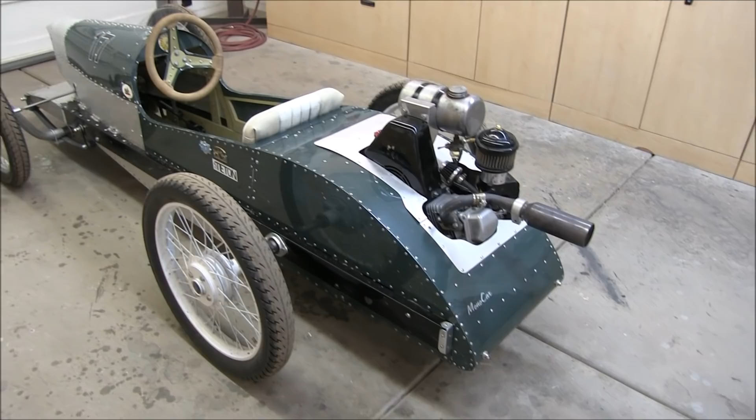I've had this dream for a while to upgrade the Monocar to a differential. So I've been collecting parts. I have a differential there and hydraulic brakes, new rear hubs. So I plan here to remove the rear cover and just try to make an assessment before I rip the thing apart. Try to figure out if I can actually pull it off. This is a fairly narrow chassis, so who knows, we'll see. So I'm going to take off the cover here and see what I can find out.

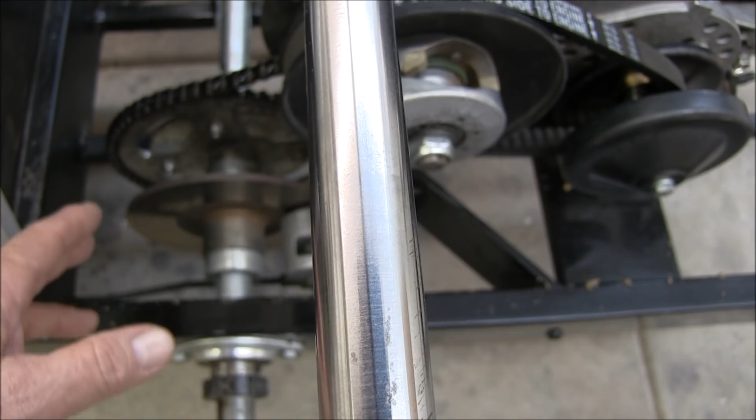So what you see here is a Peerless differential with a vintage Cartco adapter. And then they also make these sprockets. This is a 54 tooth, I believe. It's designed to fit the 40 size chain. Now on the Monocar right now I'm using a 35, and it's considerably smaller sprocket. It's a 35 chain with a 60 tooth. So you can see when you go with a bigger chain, it's a much bigger sprocket.

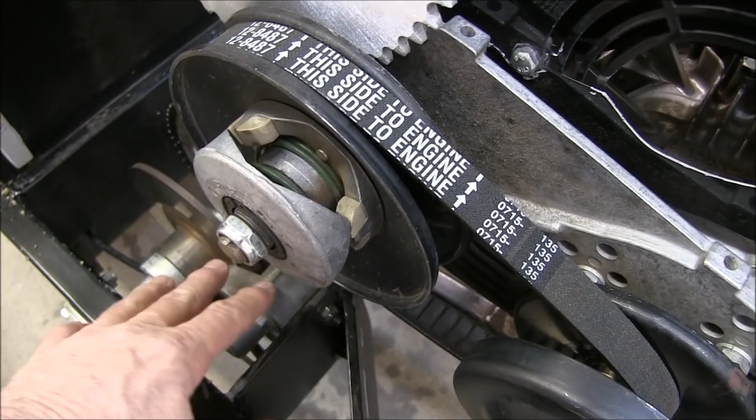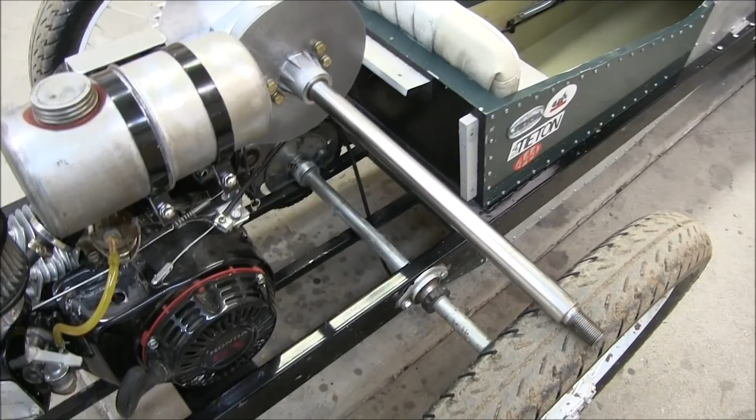So I've been thinking about this, and the way I can make this work is I'll need to remove this bracket in the old brake system, so that'll go away. The new disc, of course, will be right in here where there's ample room, and I'll have the caliper probably up here on the front. Then I can box it in here with the 1x3 tubing. Yeah, that might just work okay.

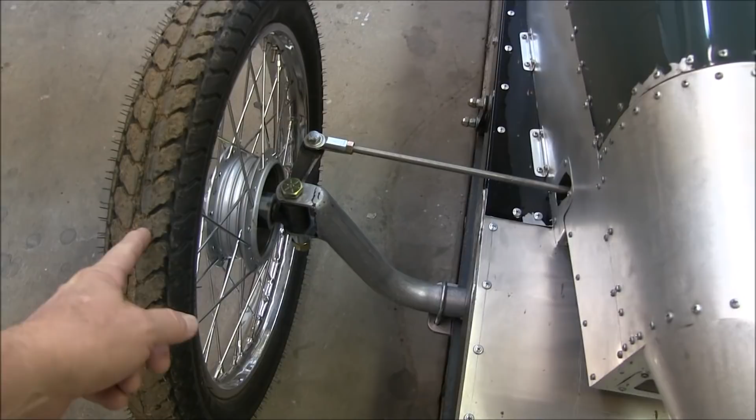See, the width of the track on the front of the car here from center of the tire to center of tire is 38 inches. And with the old go-kart axle, I'm at 36 inches in the rear. But when you run the Peerless differential with the Cartco hubs, your final width is close to, let's see, 38 or 39 inches. It should be pretty close to what I have right now. I forget. I'll have to measure one of their cars and I'll let you know what that is.

Okay, so I've convinced myself that I can swap this differential out. Basically, I got to remove the old setup. I'll take the engine off, and then I'll have to grind and do some cutting to get these old components out of there, and then I can start the process of cutting the frame right here, so this will drop in, and adding some additional supports, which I'll tell you all about pretty much as I get there. Okay, this should be a nice upgrade. A bit of a challenge, but what the heck, right? Okay, let's move on.

So my thinking is I have to cut out these two bars here. I have to cut this out. So that'll get rid of that. I'll get the axle out of there. That'll just create an open area where I can work from without affecting the placement of the motor or how it attaches.

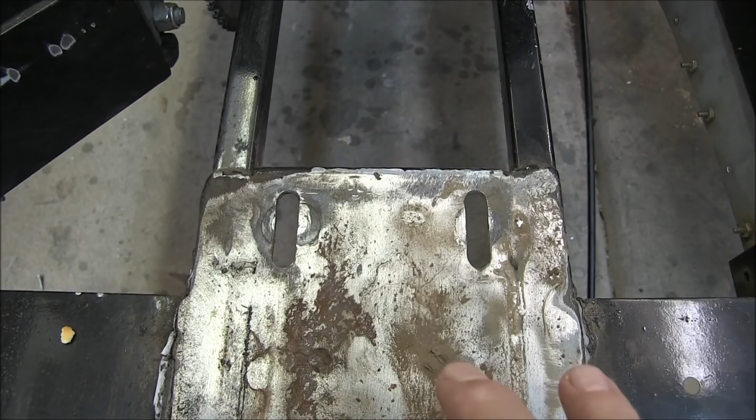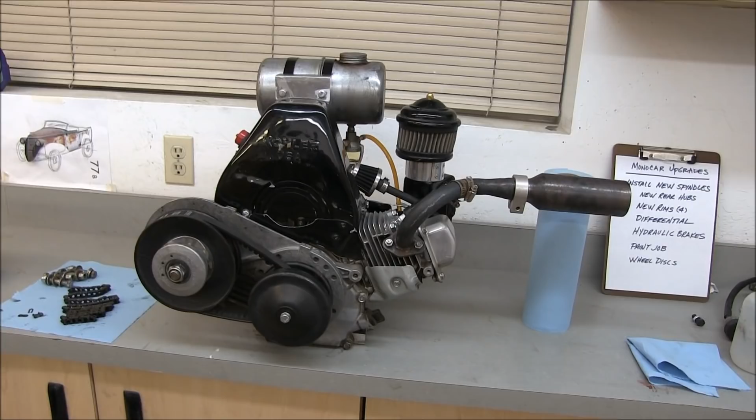I wanted to take a minute and say that, you know, if you're building a cycle cart with the one-wheel drive arrangement, it's a perfectly acceptable way to put together the rear axle. I've had a lot of fun with this car, and there's really nothing wrong with it. Works great. As you can see, this is the drive wheel, and this is the free wheel. So just because I'm switching to a differential doesn't mean I don't like this setup. I just wanted to try something out. See if it works.

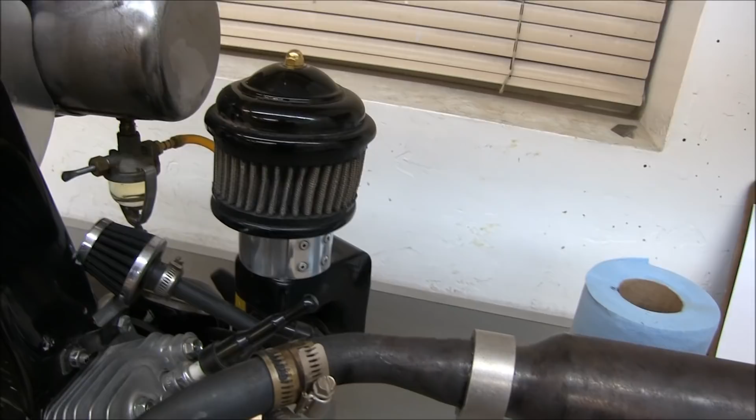A little bit about this motor. Back when I built the Monocar and I originally installed this GX200, it had a modern look to it, you know, and if you were to look at the Monocar photographs, the engine's in the rear and it's exposed. So I didn't want this modern look, so this is where I came up with the idea of grafting on this Kohler shroud and the tank, and then I kind of fashioned this air cleaner and intake. But the whole idea was to make the motor look more antique looking, more like the original car, the British AV Monocar. So it's worked out pretty good.

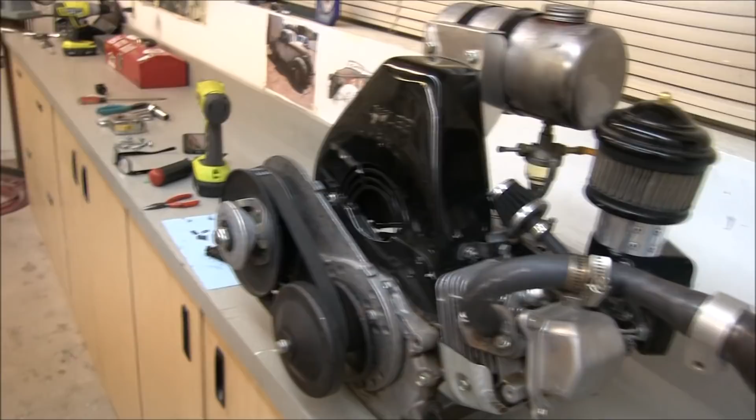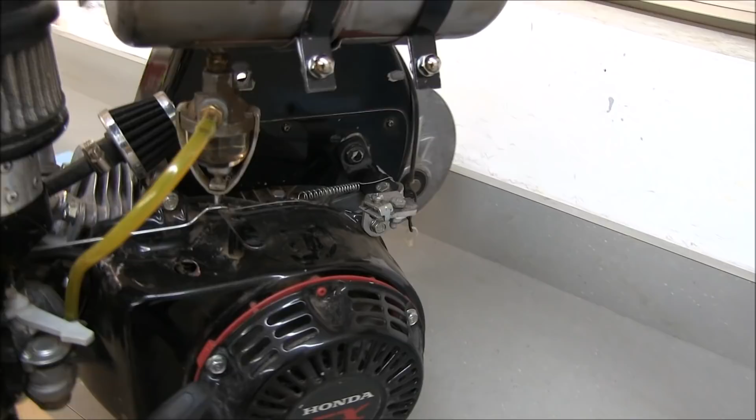You know, I took the governor off this engine. I put the Venturi in it, a timing key, the bored out carburetor, and then a header. So it's running 11 horsepower or so, and it propels this car up to close to 50 miles an hour, which is more than enough speed for me. Anyway, I call it a little sleeper motor because it looks like an antique motor on top, and many people think that it is, but underneath it's a modern engine.

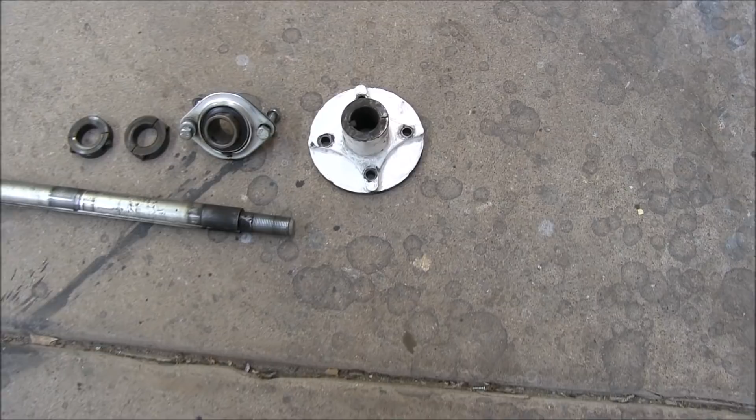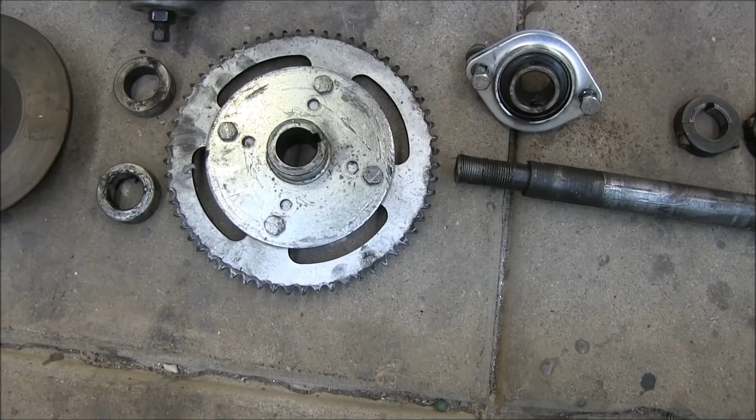Well, I'm not going to lie to you, it took me about an hour to get this axle out of there. Man, it was stubborn. But I licked it and got it done. Here's the components. Cartco rear hub and the bearing and collars, the axle, the sprocket and the sprocket holder, the disc and the brake caliper. Right.

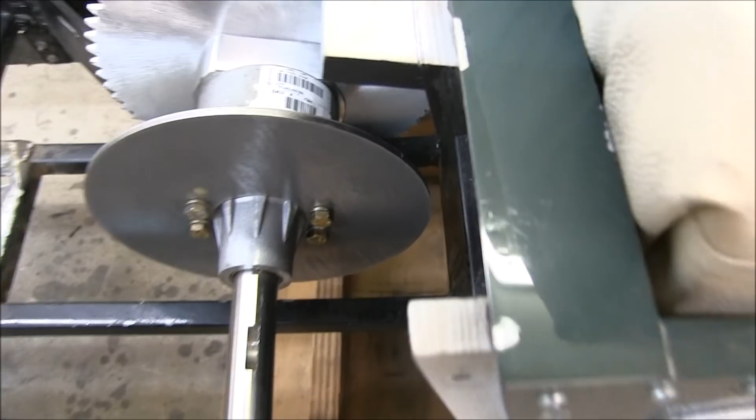Well, it looks like this thing might just work out. We've got the axle more or less lined up, and there's plenty of room for the disc, but of course it's just too tight down in there for the sprocket. But with the smaller number 35 chain and 62 sprocket, it should work fine. I want to cut these two bars out and get this out of here. Alright, yep, this just might work out alright.

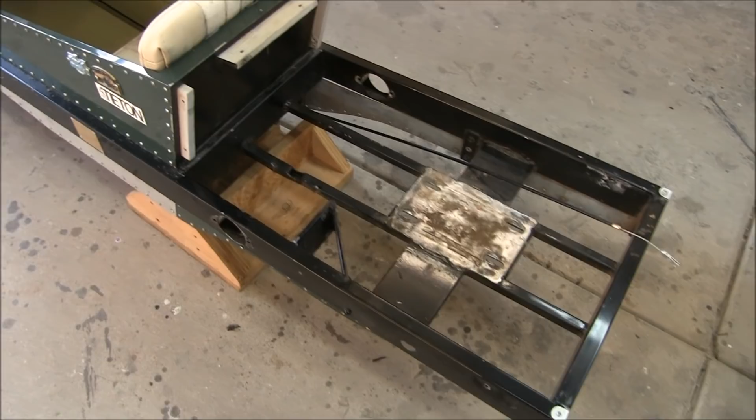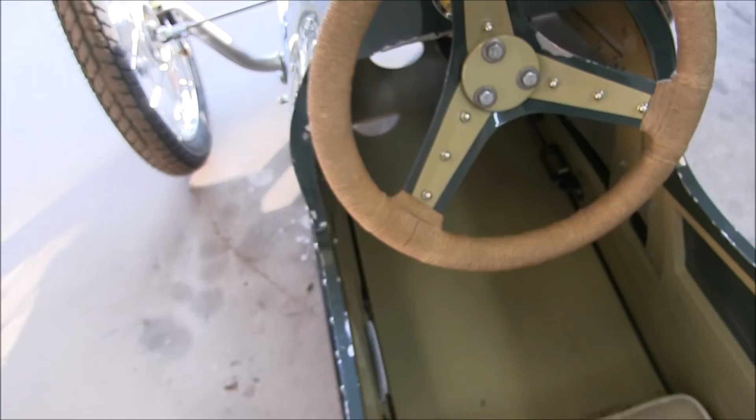I've decided that I'm going to tear this further down. I'm going to basically try to take it down to the chassis. I figure I can get to everything back here okay, but making room for the pedal and the master cylinder and all that up inside there, I think it'd just be easier if I get the body off of it, and then when it comes time to test drive it, it'll just be a bare chassis. Alright, let's take this thing apart.

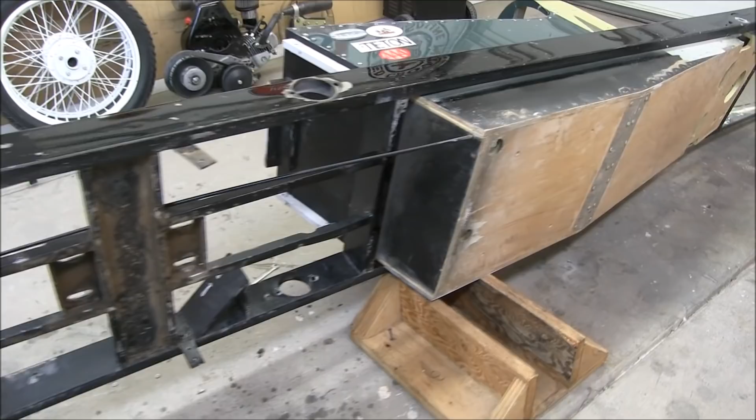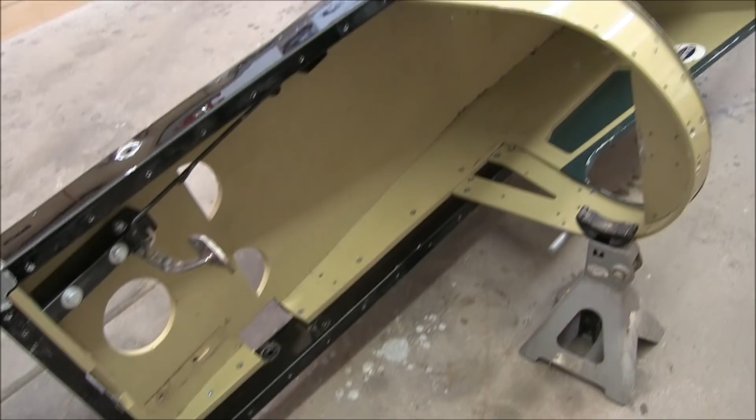I'm making pretty good progress here getting this thing stripped down to the bare chassis. Another hour's worth of work or so and I'll have it where I want it to be. Just a few more screws and I'll be able to pull this tub out of the frame here. Okay, it's time to wrestle the wooden tub out of the chassis. Alright, that wasn't too bad.

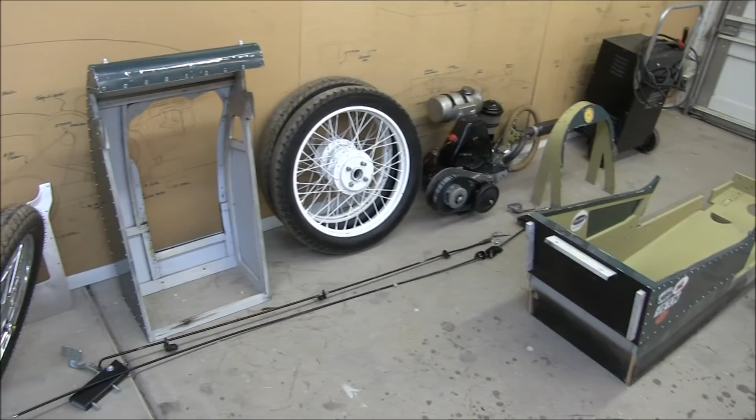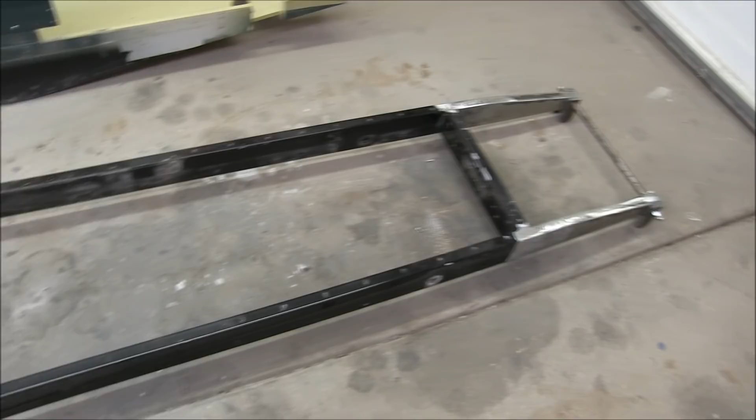So the name of this video series is Rebuilding the Monocar, so I guess that's what I'm doing. It's nice to have it down to the bare chassis because now I can really detail it properly and just clean everything up, freshen it up. I'll have a nice new cyclekart when it's done.

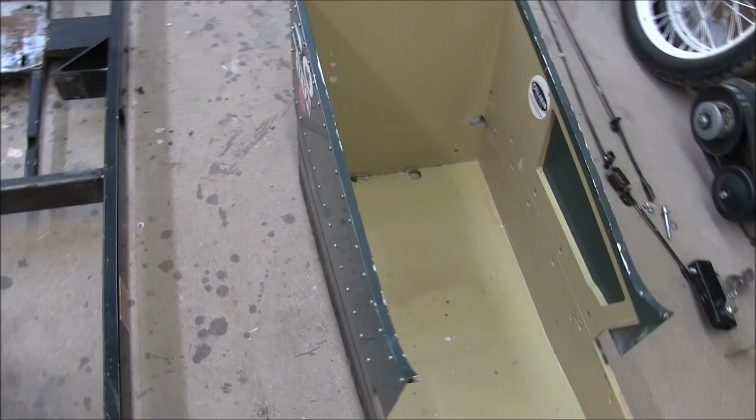You know, I was thinking about how much this thing weighed when I lifted it up. It was fairly light, and I think it was around 11 pounds. And I think that was before I put the aluminum skin on, so maybe it's 15 pounds for the wood tub. Not bad. This car weighed 258 pounds with a gallon of gas in it. It'll weigh a little bit more with this differential, but it'll certainly drive better. Okay, I'm looking forward to cleaning everything up. I thought I would wash the dirt and grease off of this chassis.

So with my Sawzall, I cut out the 2 bars that were right here. That went pretty good. Now this piece, I might take my plasma torch to that. We'll see. That's going to be a little tougher. I also want to strip all the paint off of it. Won't be too tough, I don't think.

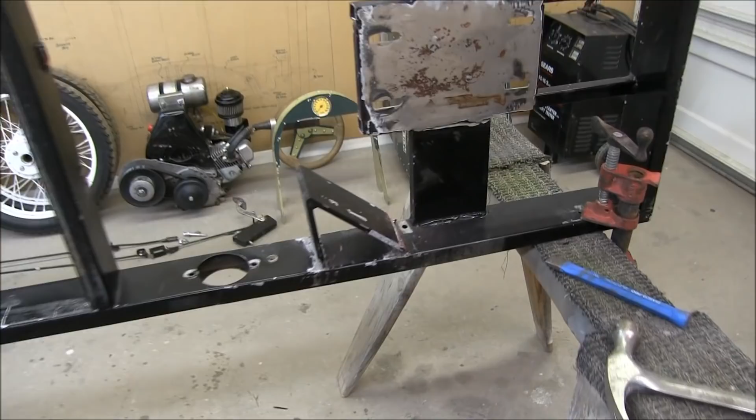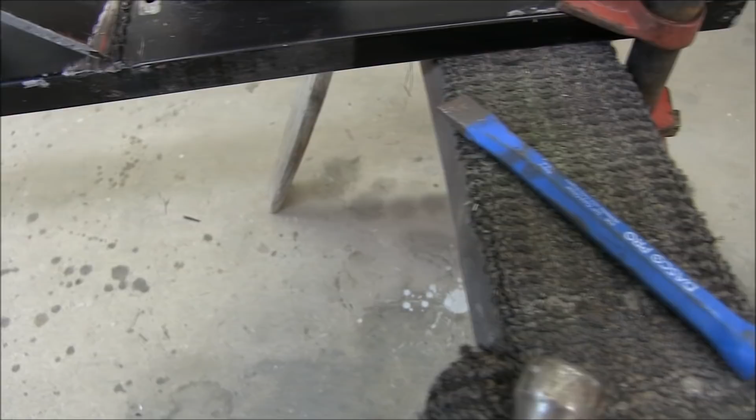Well, removing this piece has been a little bit more of a challenge, but I used the Sawzall to cut through the welds, and then a cold chisel to break it loose, and there I have it. Alright, well that won't be too tough to clean up. Alright, it's coming along.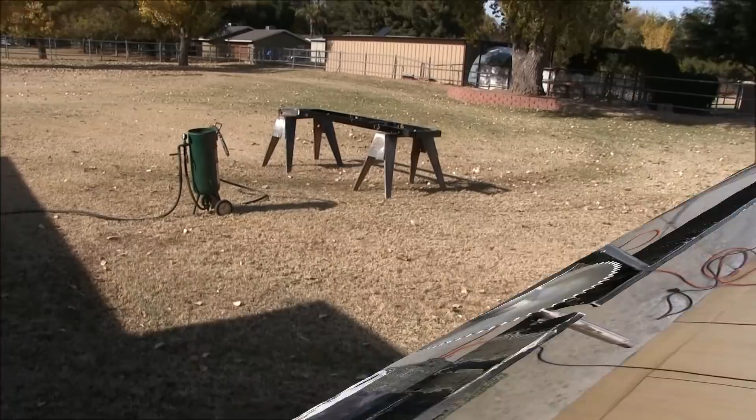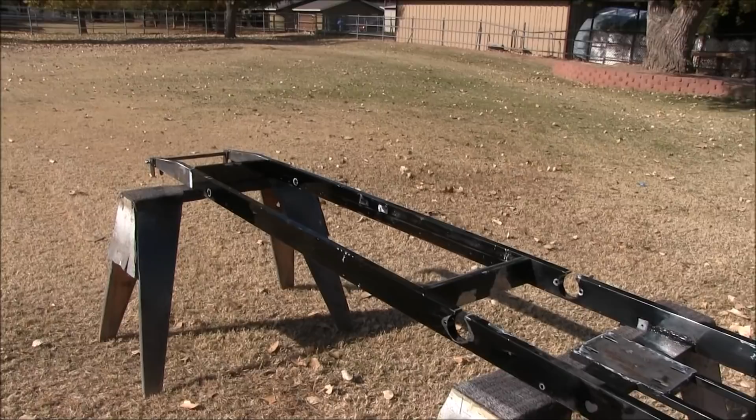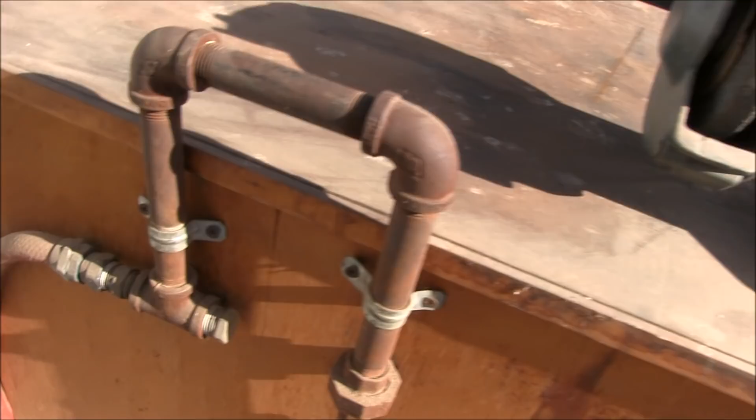Okay, so I have the chassis out here on a couple sawhorses, and I'm going to use the sandblaster to knock all the paint off. Shouldn't take very long. Here's the hose running under the fence to the compressor. The hose comes around and then through a little filter, and then this pipe helps trap condensate. And then through the hose and out of the compressor.

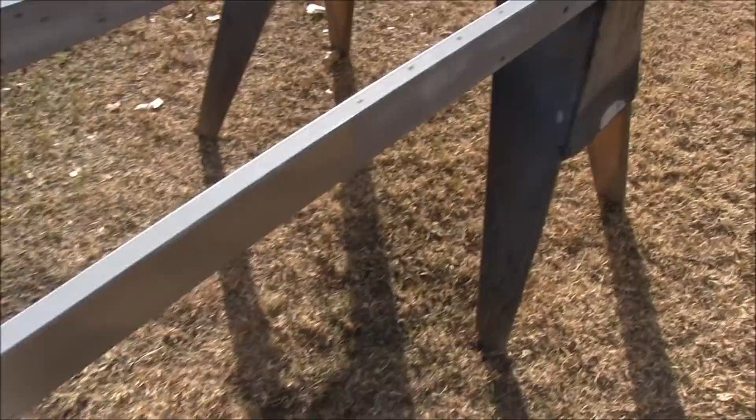Okay, I'm pleased with the results. I'm down to bare metal, and I'll take a DA sander to it with 180 grit, clean up all the metal. Plus there's a couple of places I need to grind and to fill in with some weld, and just make for a real nice clean chassis that I can add the new components to for the differential. Okay, moving on.

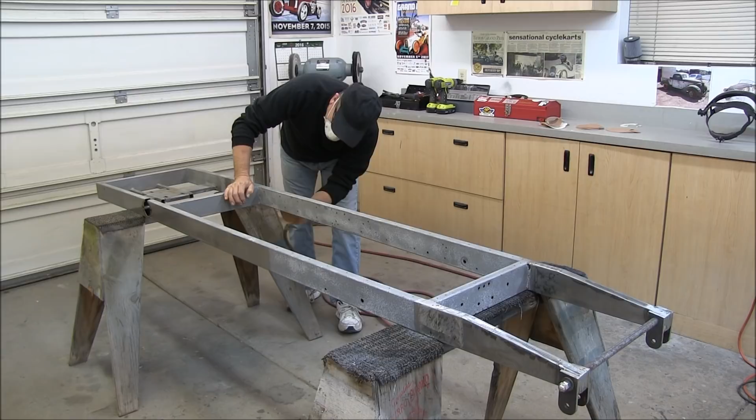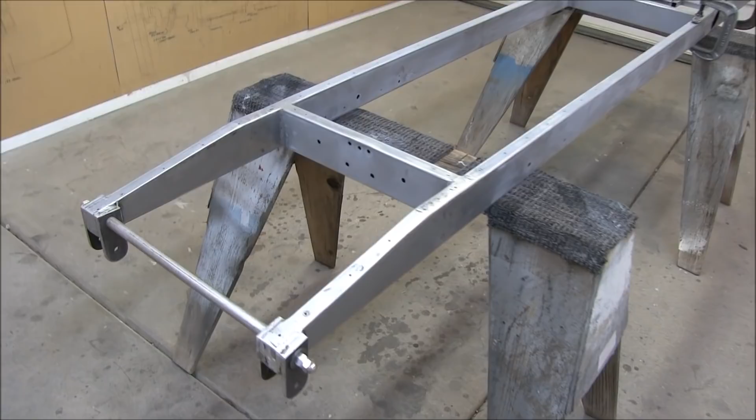I finished sanding the frame, getting it all ready to go. So it's basically ready for primer, with the exception of where I need to add additional cross braces for the bearing support. So I've been thinking about it, and I have an idea. I did a little sketch. Let me show you what I have in mind.

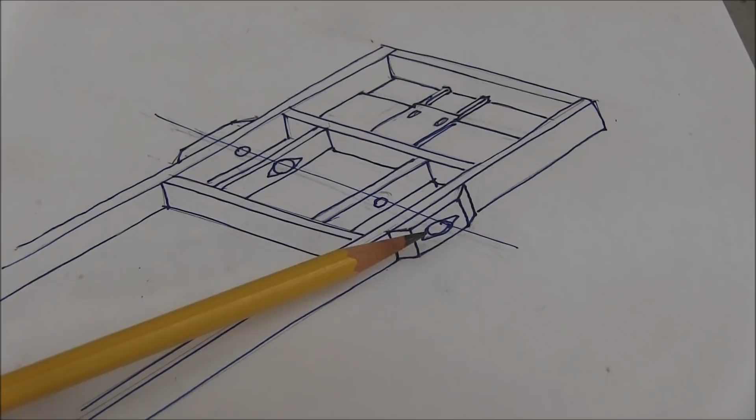Okay, so here's a sketch of the rear of the chassis. Right here is where I'm going to add supports. So one thing I'm going to do is extend the width of the chassis, getting these bearings a little further outboard. So these little blocks here will house bearings. Then I'm going to add these 2 supports. They'll also have bearings in them, and they'll be closer to the differential.

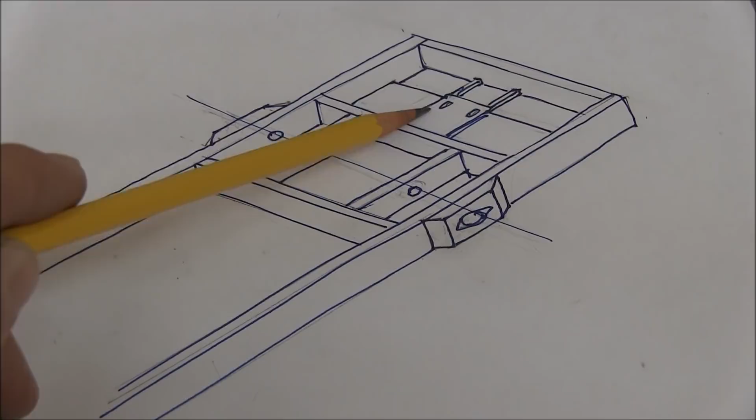And then this cross brace I'll have to add. I'll have to mock up the engine to make sure that doesn't get in the way. I checked it out earlier. It appears that it'll be alright. We'll see. Okay, let's cut up some parts and pieces and get things ready to weld.

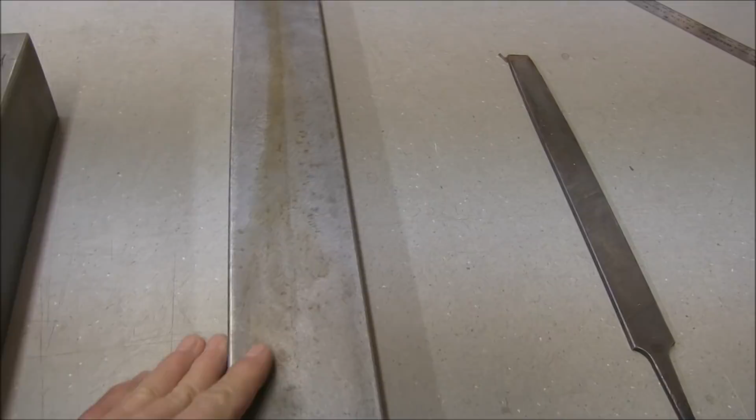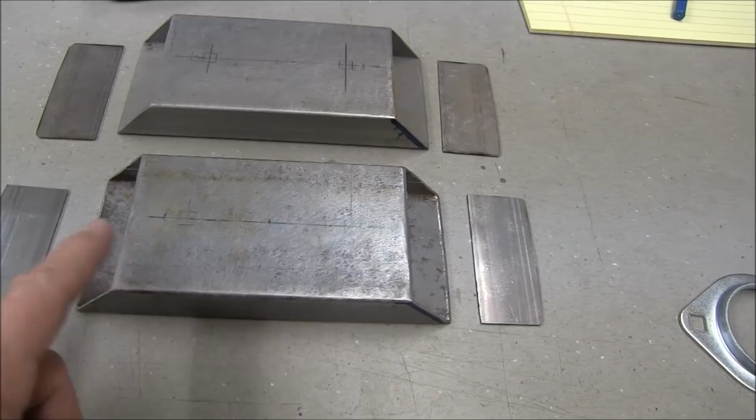So here are the pieces. They're still a little bit long, but that's okay. I've laid them out. I know where I have to drill the holes. Here's the little extension pieces. I have to weld these on. So everything's ready for that process. Alright, let's go out and weld these.

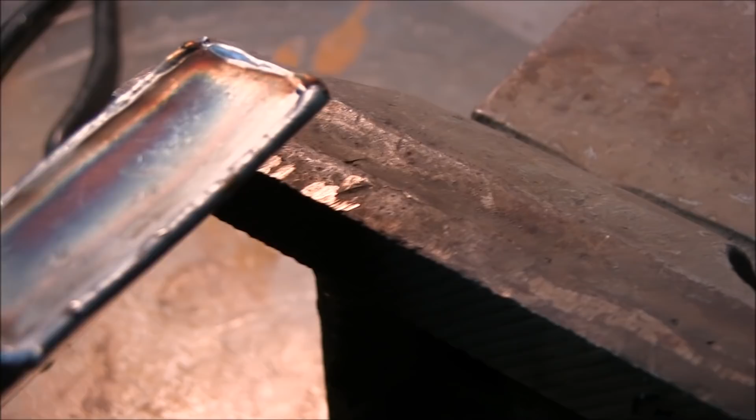Okay, so I'm happy with the way these little extensions came together. I have to drill the 2.5 inch hole on this side and the 1.5 inch hole on that side. But before I drill these, there's 2 of these. There's some layout marks there, they're real faint.

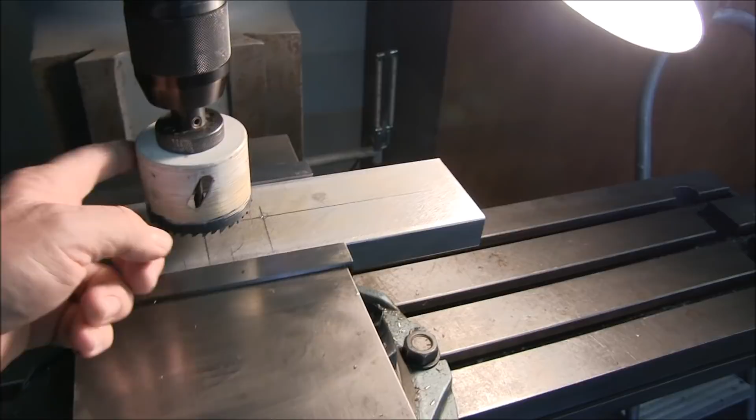Anyway, I've been working on a setup out in the mill, in the metal shop here, for drilling these holes, so let me show you that now. We'll get these punched out. Here I have the 2.5 inch hole saw chucked up and ready to go, all centered up, clamped down, ready to drill. So let's see how this works.

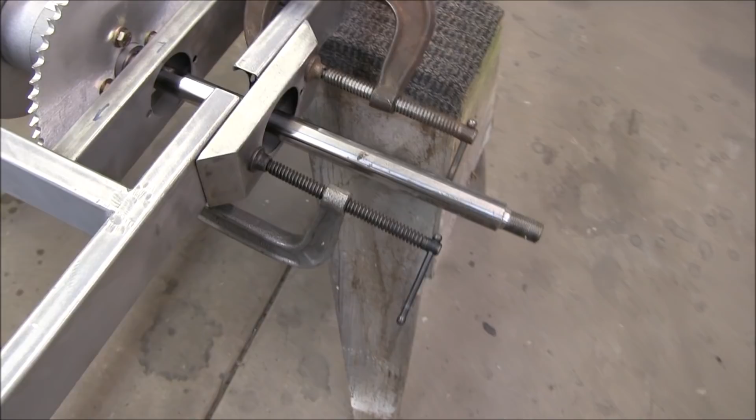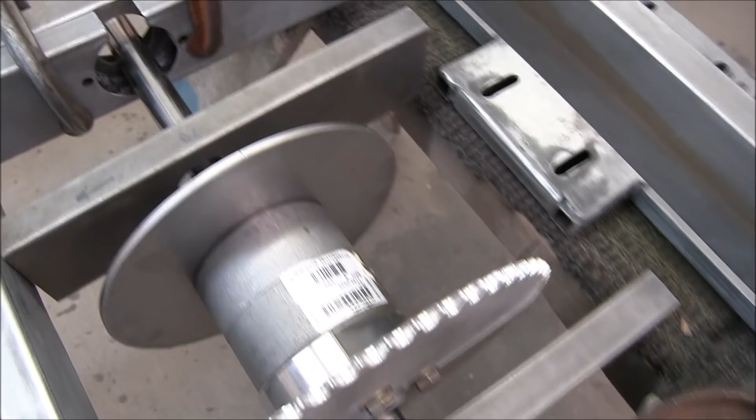Here's kind of a partial mock-up of what I'm doing. I got quite a bit of work in these little pieces. This one here will have the bearing, and this is just loosely sitting in here, but there'll be a bearing there and here, and then on outboard here. There'll be a plate across here. I'll have to cut these out here, here, and here. So remember, the whole idea is I can lift the differential and axle out from the top.

So I still have plates, 2-inch wide plate with long bolts, nuts and bolts, you know, plate top and bottom. Same thing here. So another evening or two and I'll have everything made to where I can weld it. This is long right now, which I'll cut to size once I finish with the mock-up.

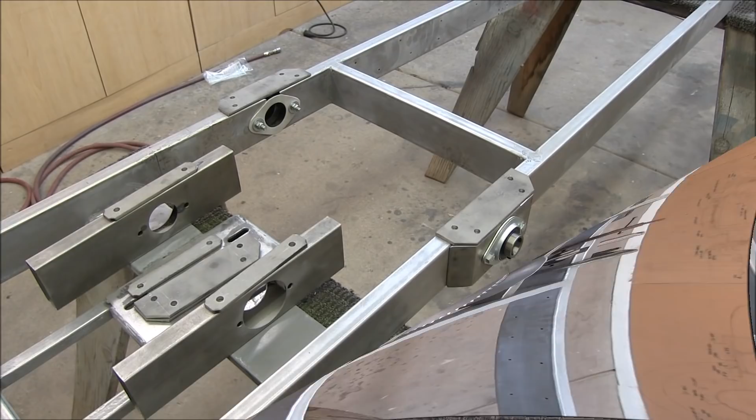Okay. I've been continuing on, so here's the latest. I've got these bolted on now. I'm going to ultimately weld this, but I'm bolting it on for now. Got the bearing in here. And the whole idea here is I made these plates. These are the bottom plates. So while this is mocked up, I'm going to drill all the way through everything. I got me some nice long 5/16 bolts to join that together. Now ultimately, I'll cut it out right here.

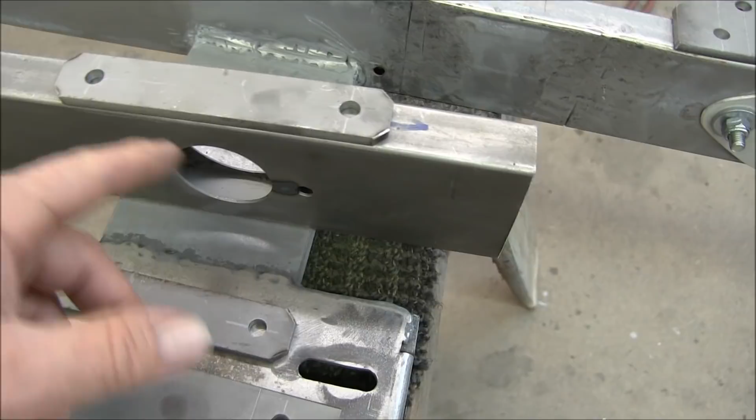Did the same thing over here. I made this little plate just to add strength. And then these will be, in essence, the same thing, but only 1 inch thick. The bearing will be in here, and this is the top and bottom plate. So I think that'll be stout enough. But I've spent a good week of evenings making these parts, so I'm anxious to get the drilling done and

the welding done. One other thing I did is I added these little crush tubes, tacked them in place so I can tighten up the nuts and bolts without crushing the rectangle tube. Okay, keep plugging away.

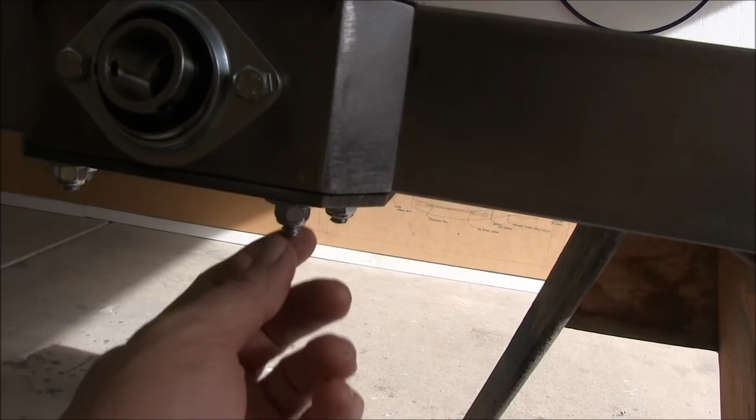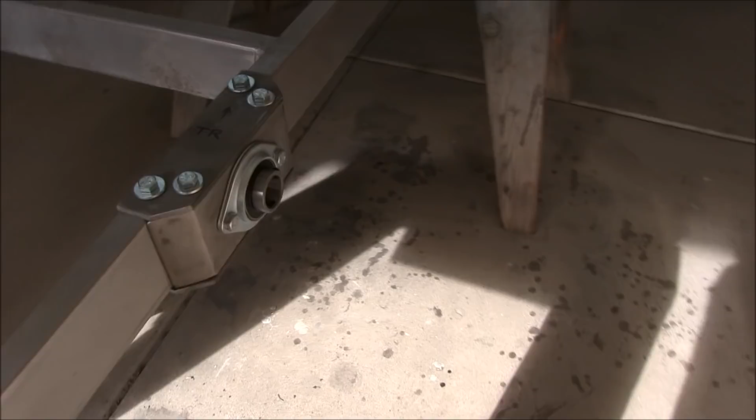Okay, I have everything bolted together now. These were long. I cut them off, cleaned them up, so now they're just the right length. And this thing is built, I'm telling you. That is stout as hell. Yep. I'm happy with that. So I think I can mock up the axle because to put in these two center ones, I want to have the axle in these bearings. Alright, I think that's what I'm going to do next.

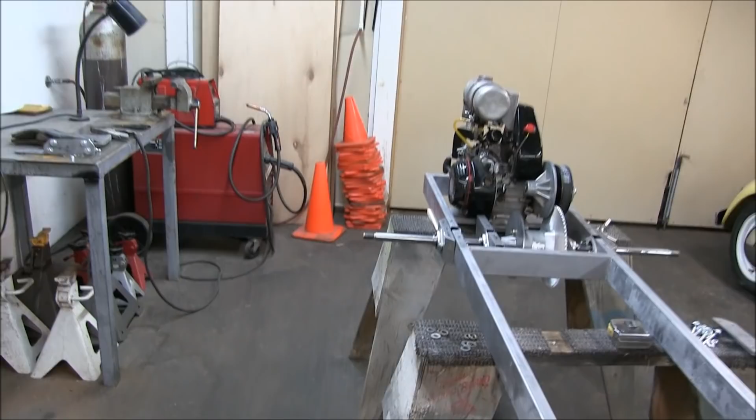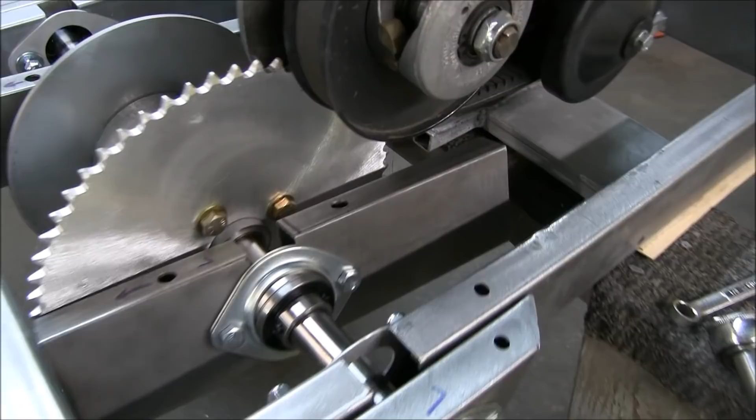I've moved everything out here into the metal shop because I'm going to be welding as soon as I get done with this mock-up. So I'm close to the welder. So I have yet to install these two pieces. Really, that's what this setup is all about. It's to get these right where I want them to be, and also to make sure a cross brace will fit right in here, and it appears that it will. These are a little bit long yet.

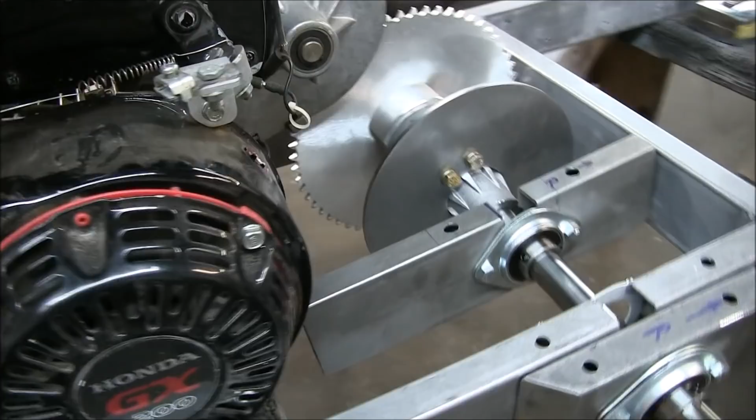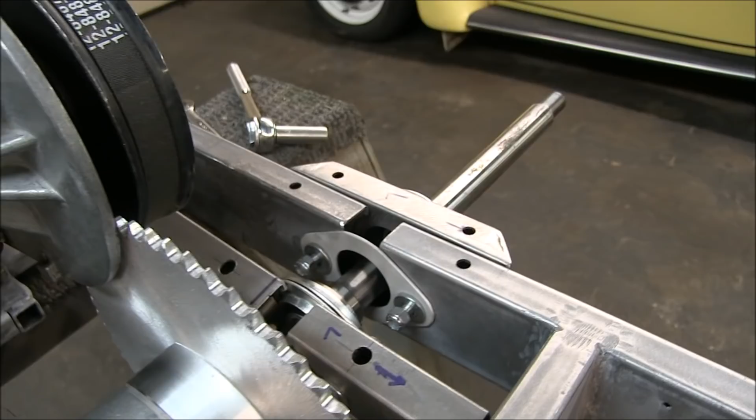So I've got the motor pretty much where I want it. The sprocket's lined up pretty good. It spins nice, and it's in the two outer bearings at this point. Okay, so this is shaping up. I'm going to keep working on the setup here until I'm happy, and then I'll weld it in.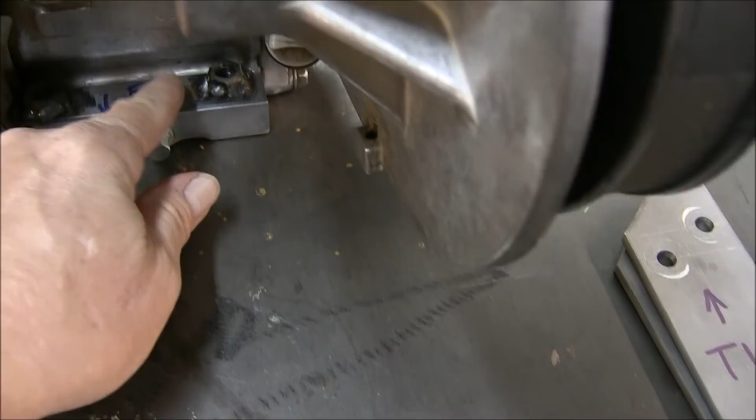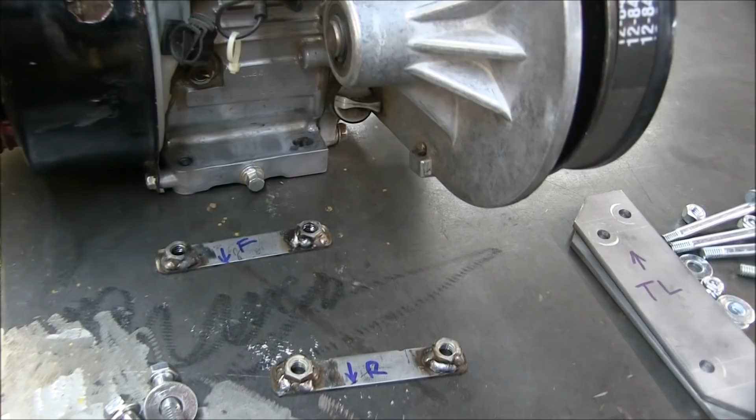Since I had the motor on the chassis doing the mock-up, I decided to make these little welded pieces here with a captured nut. That would go like that. And you know, if you own a cycle cart or you're building one, one of the toughest jobs is tightening the chain. You got to get 2 wrenches, you got to loosen all 4 nuts and bolts, it's just a pain in the butt. So with this arrangement, you just have to reach underneath and loosen the 4 bolts.

My welds look like crap, but we'll see. If they break, I'll weld them again. Anyway, that's a nice little upgrade that I've been wanting to do for a long time. Took me half an afternoon though. Alright, on to welding that chassis. I have that ready to go. I'll show you where I'm at.

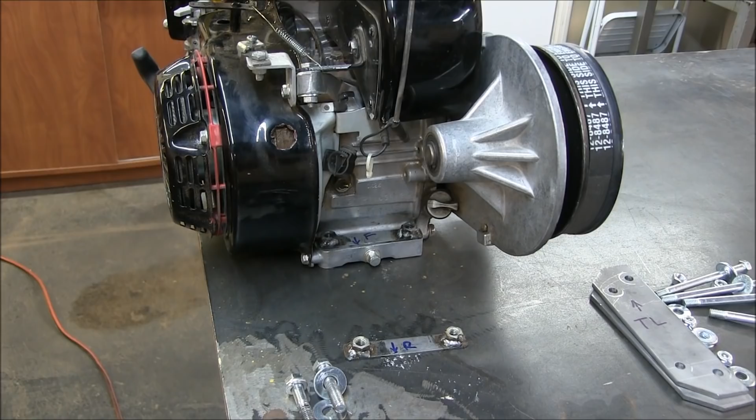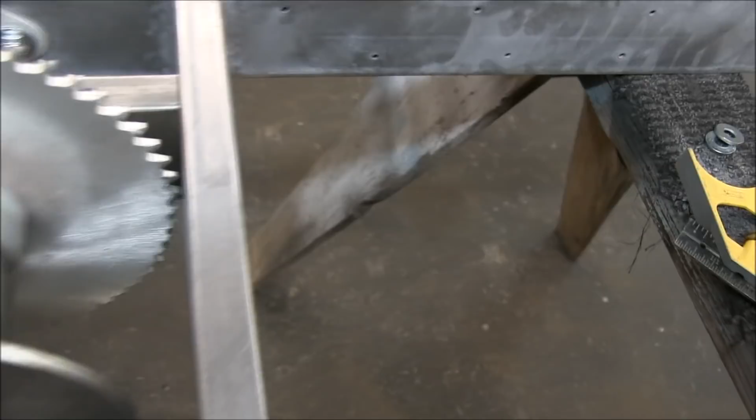This has been a bigger challenge than I thought it would be, but I'm happy with the way it's all coming together. I have this piece tacked in place. These are just wedged in there, but they're right where I want them to be. Everything spins nicely. Of course, I'm going to replace this with a smaller 60-tooth, the 35 chain sprocket. You can see it's right there. Alright, I'm going to get these welded in. I finished tack welding everything in place. Now I'm going to remove the rear axle, and you can kind of see how it goes together here.

Okay, so now you can see there's the whole axle. I decided to leave these loose to be slid on the axle. So that works out pretty good. That was my concept anyway. Now I can finish the welding on this chassis, get this all boxed in and completed.

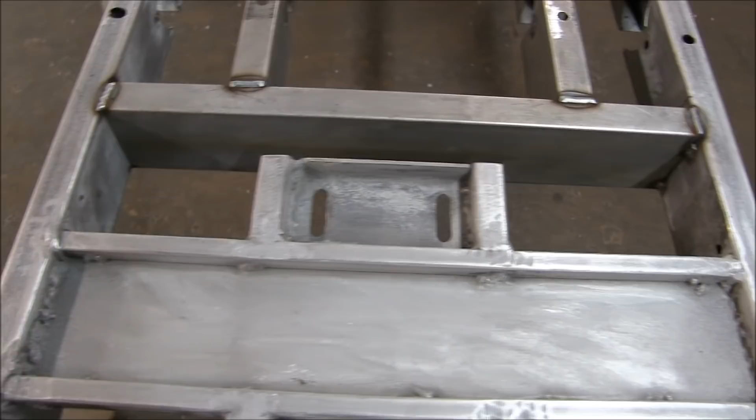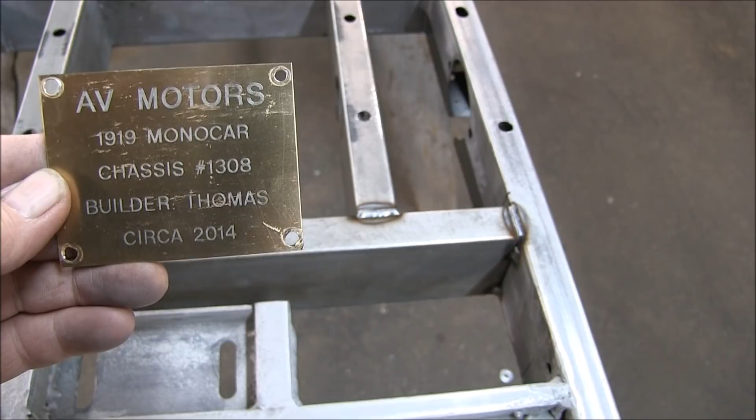Okay, so I rolled the chassis over and I'm fixing to weld on it here. But I noticed one little thing. Let me show you something here. So this is the chassis plate, and I built this circa 2014. And at that time I was just learning to weld. So here's an example of my welding from then, and then here's my welding now. So I still have a long way to go, but I'd say that's a definite improvement.

It just goes to show you guys, if you don't know how to weld, don't worry about it. Just dive right in. Okay, let's weld this thing up. I'm glad that I stripped this chassis down bare, because the detail work is coming along nicely. This new substructure is nice and stout. I added these little pieces in here to re-strengthen this engine mounting area. This is the bottom of the chassis right there. Yeah.

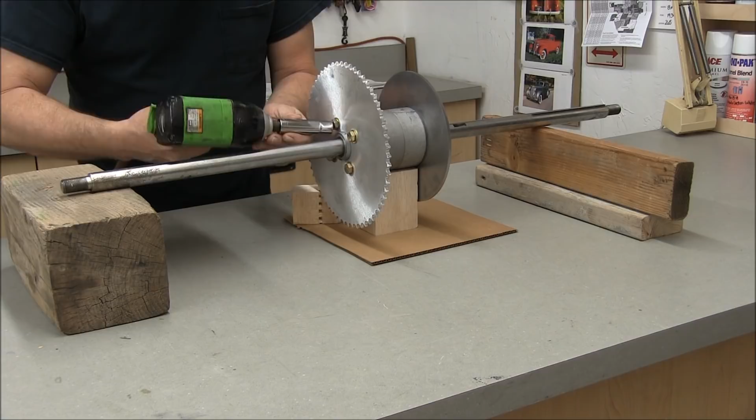So the next thing I need to do is get that small sprocket, see if the one I have will fit on that differential. So let's take that differential apart and see what it's made of. So what I want to know is if that hole pattern is the same on the 60 tooth. That would sure make life easy if it was. So this spacer here is held on by these bolts. They go all the way through, and there's some stop nuts in there holding that together. So if I was to loosen those, this would come apart.

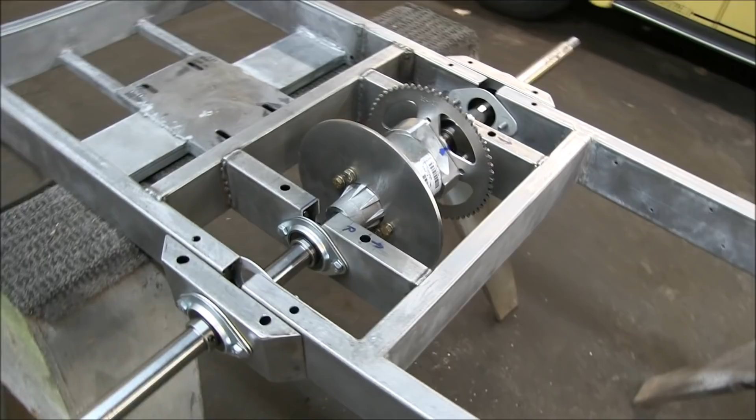So here it is with the 60-tooth sprocket inside the chassis. Plenty of room. So I've just loosely fitted it in. I don't have any of the nuts on there yet. So I'm going to do that and then install the top and bottom plates, and the installation will be complete. This was definitely a challenge, but worth the effort, I think. We got a nice, compact, stout little setup. You know, this is the heart and soul of this cycle cart, the business end. Mile after mile and hour after hour, this is where the work will be done.

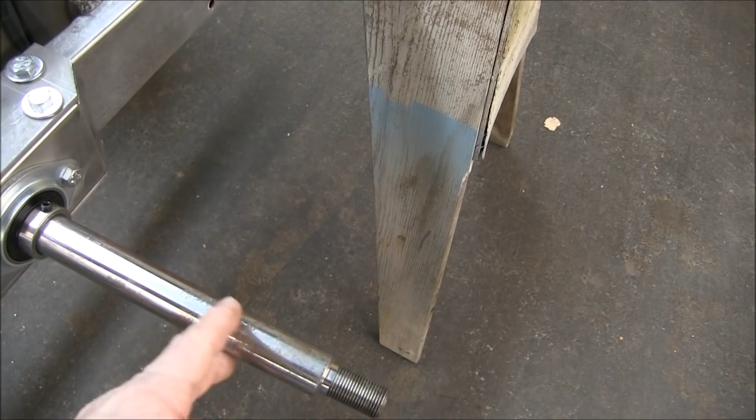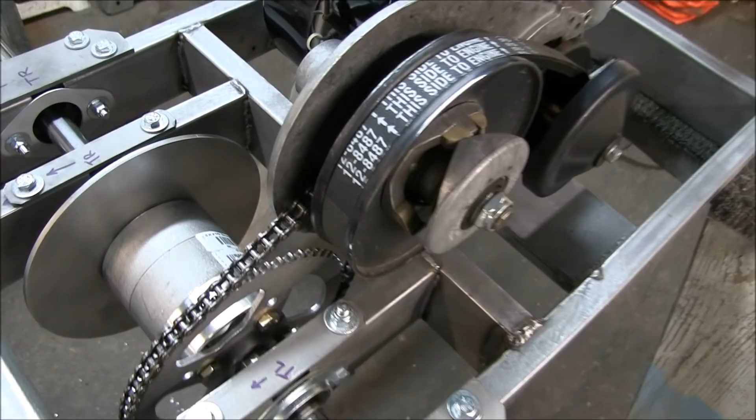Alright, this is going to be a sweet ride. Since everything is bolted down tight, what do you say we fire it up and watch it spin? I don't know why, but that's fun to watch. Okay.

Alright, let's call this the end of the second video. I'm up to the 30-minute mark. So I'll be working on this caliper and brake pedal setup, and I'm thinking about putting an aluminum tub in it. So lots of good things coming up, so stay tuned.